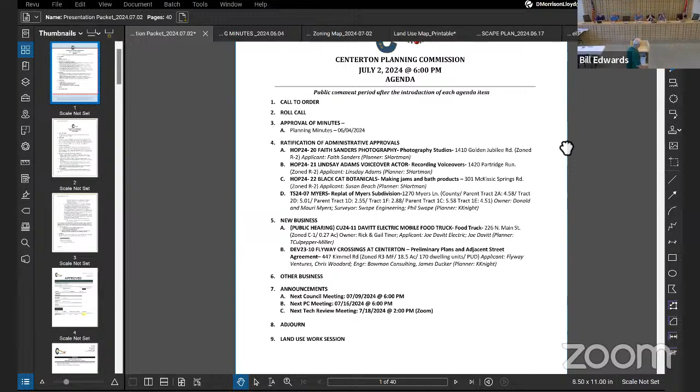Well, now we gotta wait on Rabal. All right, go ahead. Now we gotta wait on Rabal, going to Brian. Hey, you don't have to wait on him, go. I'll tell him you can start. Doc is paid, yeah, doctor's pay. Start the clock.

Doc is paid, pretty serious about getting the plat signed. I heard you got it. Kayla sent me an Instagram. Let me take your name. Kayla did? Yeah. You know what, she's not nice, I mean...

You sent me an Instagram about signing some plats. Oh no, I was, if it's urgent, not nasty, I'm sorry. All right, we're gonna get started before Joey gets in trouble.

Go ahead and call the City of Centerton Planning Commission meeting for July 2nd, 2024 to order with a roll call. Joey Ingle, here. Devin Murphy, here. Craig Langford, Jerry Harris, John Sessoms.

Here. Ben Lewis, Tony Davis, Brandon Swoboda, here. Jeff Seyfarth, I'm here. All right, first thing on the agenda this evening is the approval of the minutes from 6/4 of 2024.

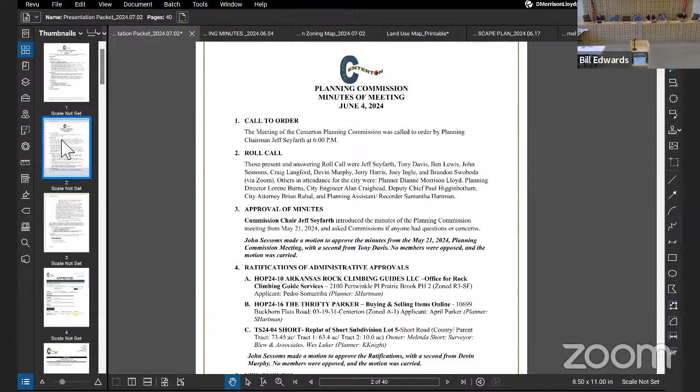I'll motion to approve the minutes from 6/4/24. Second. Motion is seconded. Is anyone opposed?

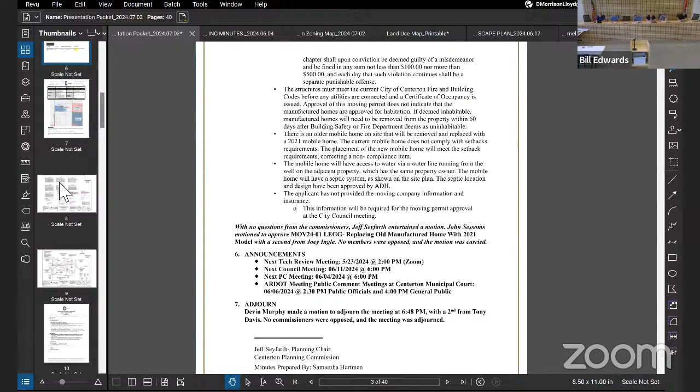All right, next on the agenda is the ratification of the admin approvals. Looks like we got a couple of home occupations, a photography business, voiceover.

Botanicals, making some products, and then we have a tract split. Any questions or comments from staff or any of the commissioners in regards to the admin approvals?

This is Joey, I'll make a motion to approve the administrative approvals. Second. Motion seconded, anyone opposed?

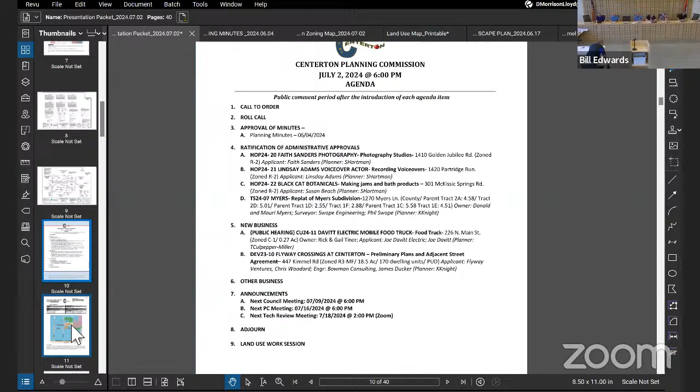All right, under new business this evening, we do have a public hearing. There's a conditional use 2411 for Davitt Electric mobile food truck.

That's at 226 North Main Street. It is on C1 and it looks like Rick and Gail Tiner are the owners and the applicant's Joe Davitt. Is the applicant here this evening? No. You want to just give us a little overview of what you guys are trying to do or what you want to do, if you.

As much as we'd like to be able to hear you back there, we can't, so just give us your name and what you guys are wanting to do for us real quick.

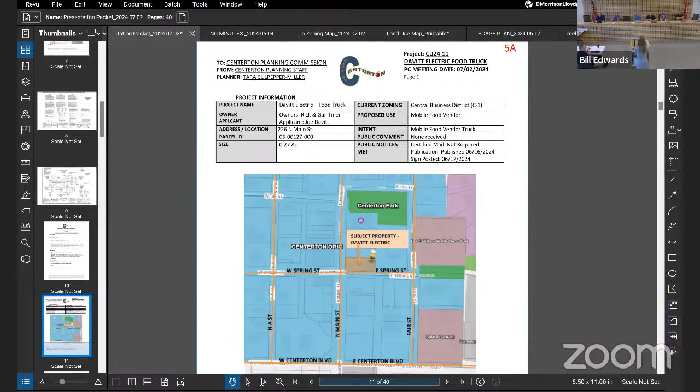Bethany Davitt, we are proposing to have a mobile food vendor, more than likely a trailer, a tow behind.

Did we do this years back with the ice? I let it lapse, and so we were trying to renew it, and so really we're just trying to reestablish it.

Are you gonna put it in the back? So you've had a food truck there before, right? Yes sir, in the back part of it. Is that where this one's going? Yes sir. Okay, all right, cool, thank you.

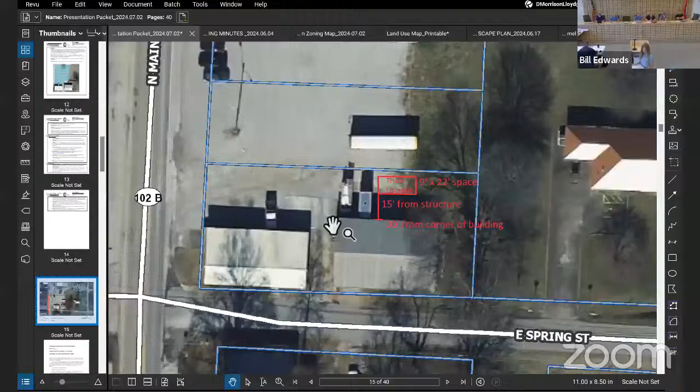Yes, I think a couple years ago this came over for, it was a parking and grease trap exposure that we looked at. So is this the renewal?

I think it's gonna end up being new, John. Okay, all right. Sarah, first time.

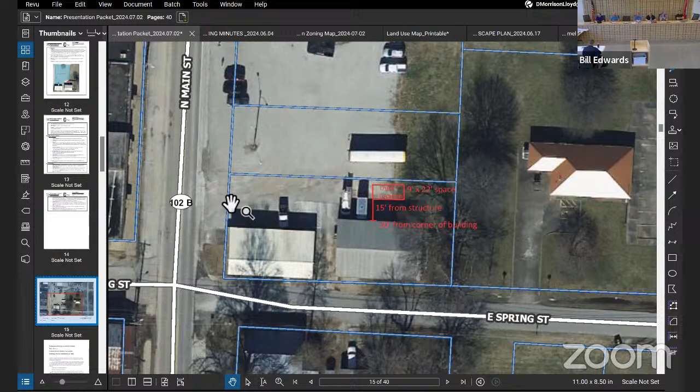It's Davitt Electric Food Truck, 226 North Main Street on 0.27 acres. It is a central business district and they met public notice requirements.

There is no food truck that's currently scheduled. The applicant's requesting conditional use for future use. This property previously had a conditional use in 2020 to allow for a mobile food vendor at this location that expired 7/21/2020.

The property is zoned Central Business District C1, which represents an area of intensive commercial use, including retail stores, banks, offices, and the like. It is the retail core of the city.

Due to the permanency of the existing structures and the nature of this district, structures may, subject to planning commission approval, be built to the front and in most cases side property lines.

The property is surrounded by Central Business District zoning. To the south of the property is a vacant building, and to the west of North Main Street is Bemco Inc. The old city hall is located north of the property.

The property can be accessed from North Main Street via an existing drive or parking lot attached to Davitt Electric. We received confirmation that customers of the food truck have permission to park in the Bemco gravel lot. Davitt has also noted that customers can park on their lot and use Bemco as overflow parking.

Public parking along Main Street is also available, that's in front of Old City Hall that customers can use as well. The proposed hours of operation are 8 AM to 8 PM Sunday to Saturday.

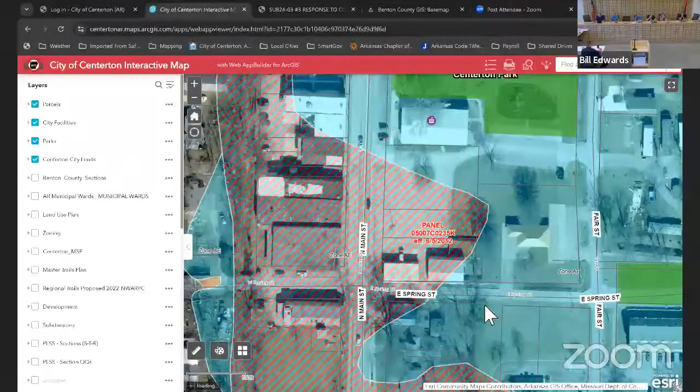Parking - they have permission to use the Bemco gravel lot for overflow. Our current off-street parking code and the mobile food vendor ordinance do not have specific requirements at this time, and any parking requirements would be at the Planning Commission's discretion for this additional use.

The hours of operation will be 8 AM to 8 PM Sunday through Saturday. However, days and hours of operation may vary from tenant to tenant, and operating hours are to be determined by the Planning Commission.

A fire inspection is required prior to receiving the business license and occupancy, and they'll have to go through Paul Higginbotham to schedule an inspection.

There will be 1 food truck in the designated location at a time, and no additional accessory structures are allowed, such as fencing, storage, decking, etc.

The food truck location is 15 feet from the structure and 30 feet from the corner of the structure.

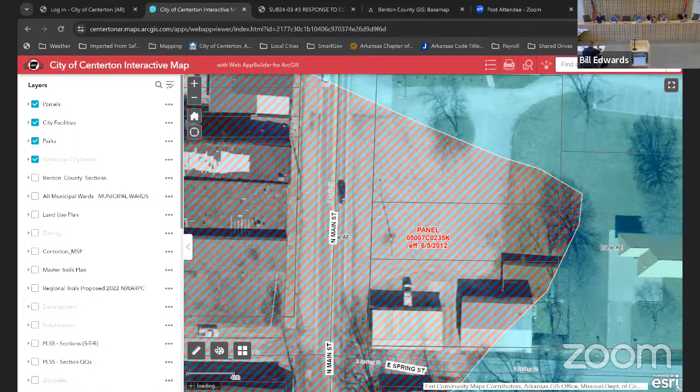The vendor or tenant shall be responsible for maintaining the premises in good, clean, and unhazardous condition. The applicant is encouraged to provide ADA accommodations, with owners to accept liability if non-ADA compliant.

The conditions of approval are shown in your packet.

Is anyone opposed to the 3-year request? No.

And then, is anyone opposed to taking the time restrictions off? That would be my recommendation, otherwise they're going to be back and forth between staff and us, and I just think there are other avenues in place if it becomes a nuisance that it could be controlled.

That's just my opinion, what do you guys think? I'm okay with that - if it becomes an issue... Yeah, I mean, it's a conditional use. All conditional uses can be brought back to us, right, if there is an issue.

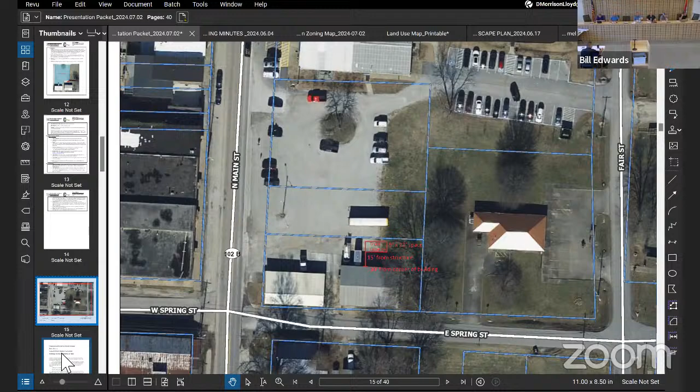Any additional questions or comments from any of the commissioners? So there was something here before? Yeah, there was actually a food truck in the back that was there previously. I don't remember the name of it, but it was really good. And up front, they had a snow cone truck at one point.

Were there any issues with parking, traffic, or waste disposal before? Not that I'm aware of. There were no issues with the one that was there previously. They were there every day too. It was right next to us, so it was very handy. We were like, oh, yum, food.

It was good. We've got two others operating right up the street. They don't have any services either. So I think it's a good spot down there with the downtown.

If there are no other questions or comments, I would entertain a motion for conditional use 2411, Davitt Electric Mobile Food Truck at 226 North Main Street, with a term of 3 years and no specified hours of operation. I'll motion to approve conditional use 2411, Davitt Electrical Mobile Food Truck, without any restrictions.

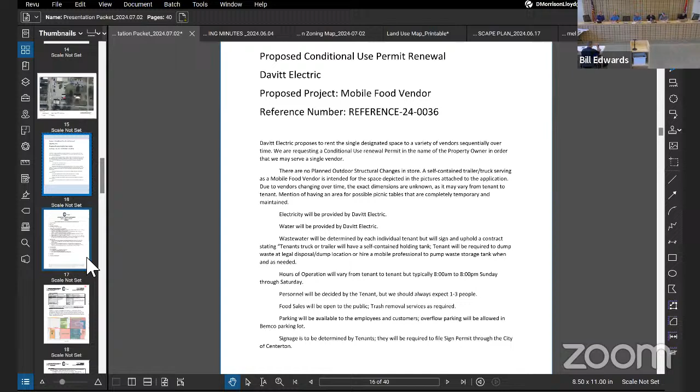Davis, yes. Brendan Swoboda, yes. Ed Lewis, yes. John Sessoms... he unmuted but it didn't come through. Sorry, yes, can you hear me? Devin Murphy, yes. Joey Engel, yes. Jeff Safar, yes. Thank you.

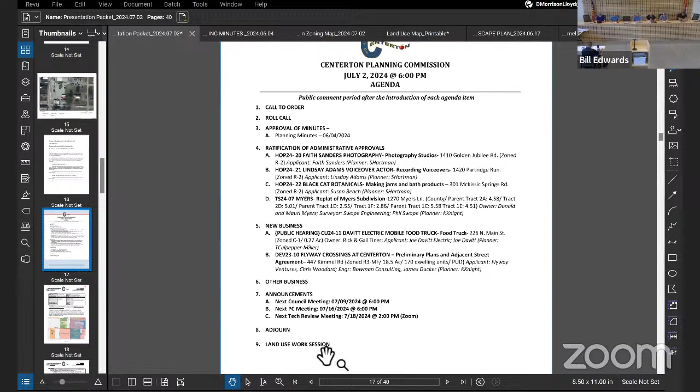All right, next on the agenda this evening is Development 2310, Flyway Crossings at Centerton, preliminary plans and adjacent street agreement. It is at 447 Kimmel Road, zoned R3 multifamily, 18.5 acres, 170 dwelling units, planned unit development. The applicant is Flyway Ventures. Is the applicant here to give us an overview?

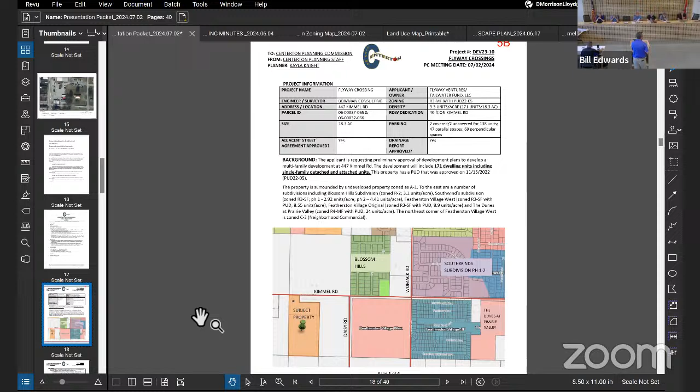Commissioners, thank you. My name is Chris Woodard, CEO of Flyway Ventures. We have a 171-unit built-for-rent concept that was approved from a rezoning perspective back in, I believe, November of '22, which is when we received the approval for that.

This is a mix of cottages, detached cottages that range from 1-bedroom duplexes, which you see in yellow, to 2-bedroom duplex, or excuse me, 2-bedroom detached and 3-bedroom detached dwellings. The 2-bed and 3-bed detached dwellings all have rear entry 2-car garages. The 1-bedroom duplexes have on-street parking, there on the south side of the property, the left side in yellow on the screen.

The purple and dark red are townhomes. Those are 2-bedroom and 3-bedroom townhomes. The lighter purple 3-building clusters are 2-bedroom townhomes. The dark red, I'll call those 4-unit clusters, are 2-bed in the middle and 3-bed on the end caps. Those are also rear loading access garages.

You'll also see, for the PUD requirements and our intention for the site, a lot of green space, pocket parks, as well as a clubhouse, pool, dog park, and walking trails—numerous amenities for the residents. This is intended to be a gated community as well, as you see on Kimmel Road on the right side of the screen, the north side of the property, which provides access to the leasing office there in white. That's also where the mail kiosk is for the residents.

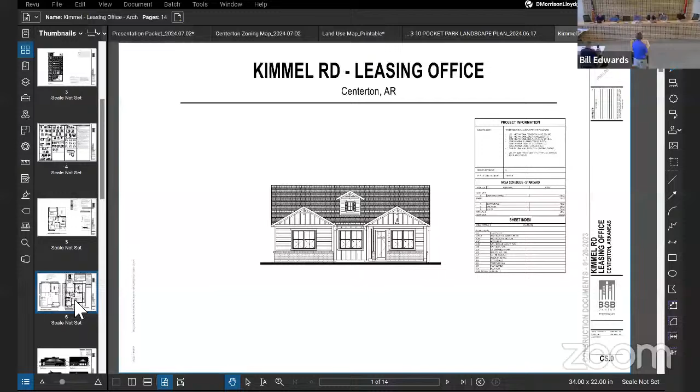To be honest, the leasing office interior is just a redesign of a unit that we're going to have on the site. The materials are a combination of Hardie fiber cement and brick skirting, more of a cottage feel for the detached units. The townhomes will be of similar style and nature, obviously 2 stories versus the 1 story cottages.

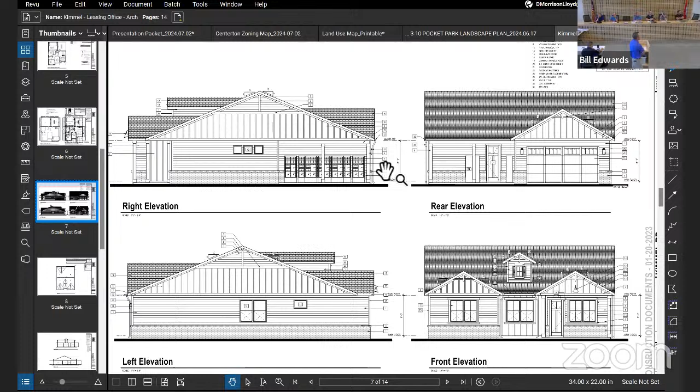So you said this is going to be a gated community? Yes, sir. So the roads are private? The roads are private.

You know, come back. Thank you.

Pamela? Yes, so the applicant is requesting preliminary approval of development plans to develop a multifamily development at 447 Kimmel Road. The development will include 171 dwelling units, including single-family detached and attached units.

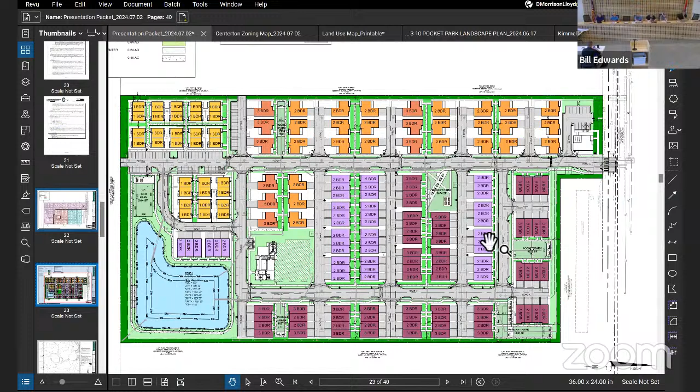The property does have a PUD that was approved November 15th of 2022. The property is surrounded by undeveloped property zoned A1. To the east there are a number of subdivisions including Blossom Hills, zoned R2, Southwind subdivision zoned R3 SF, Featherston Village West, zoned R3 SF with a PUD, Featherston Village Original, also R3 SF with a PUD, and the Dunes at Prairie Valley, which are apartments zoned R4 MF with a PUD. The northeast corner, Featherston Village West, has a small commercial area.

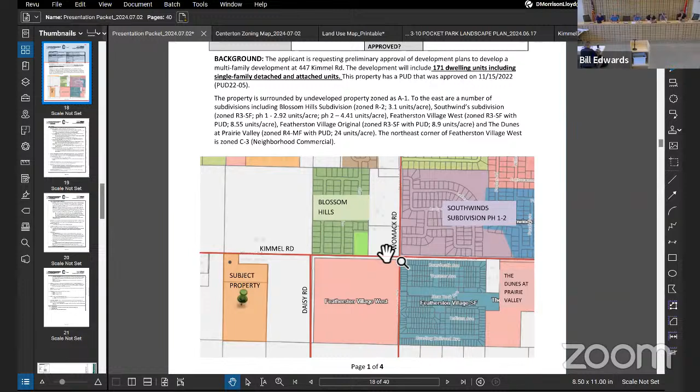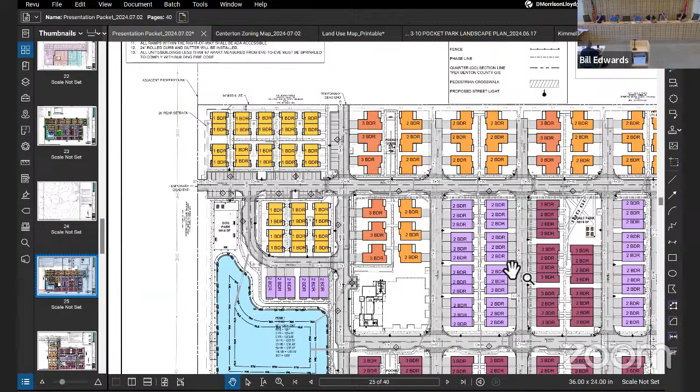With the PUD, there were some specific requirements they had to meet for ownership. The property has to be owned in a single corporate ownership at the time of filing. Right now it's owned by Flyaway Ventures, and there are no subdivisions in this development. They will have to complete a lot combination at the end of construction, combining the lots, dedicating right of way, and dedicating all easements instead of doing a plat now and a plat later.

For the density, they were limited to 179 residential units. They are proposing 171 with this development, so they meet that PUD requirement. That's 9.3 units per acre for those counting.

The architectural treatments, the PUD just required that it meets our code. Those were provided with the PUD. The facades facing the public right of way have articulations, and the material requirements were met. The only building actually viewable from the public right of way is the leasing office, and the front of the building faces Kimmel Road, so it has the articulations it needs.

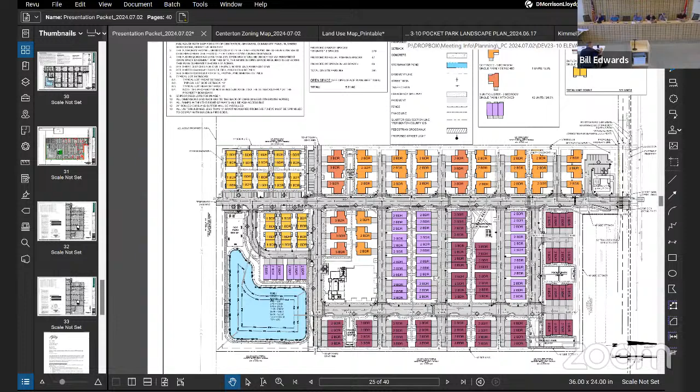For open space, they had to dedicate at least 25% open space. Per their current plan, they're dedicating 5.33 acres, which is 29% open space. For amenities, they had to include a clubhouse facility, pool area, dog park, and pocket parks, and all of those things are included. There's also a walking trail around the pond, and sidewalks throughout the development for circulation.

For the zoning, it's R3 MF, medium high density multifamily. The setbacks were not reduced with the PUD. The PUD basically just allowed them to have all of those units on one lot instead of each being on their own lot.

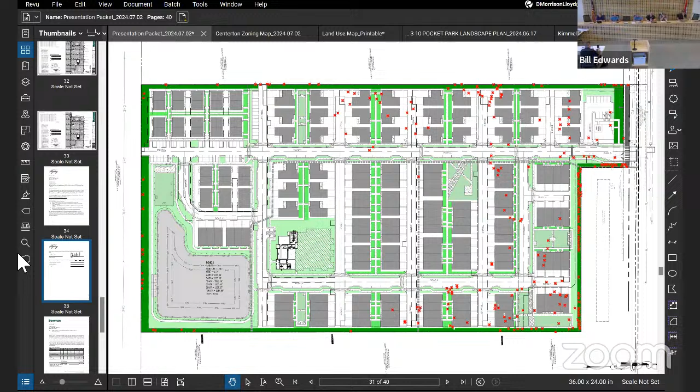There are some existing structures on site, including 2 buildings and a shed. In addition, there is a well on site. All of that is to be removed with this development, and they'll have to provide the abatement documents for the well.

For the utilities, there's water and sewer available along Kimmel Road. The note in my report says that Centerton Utilities is still doing their review. They finished it at 3pm today and had no comments, so you guys could ignore that note.

For the wetlands and floodplain, there is an existing body of water on the site. For the wetland study, the wetlands are not jurisdictional.

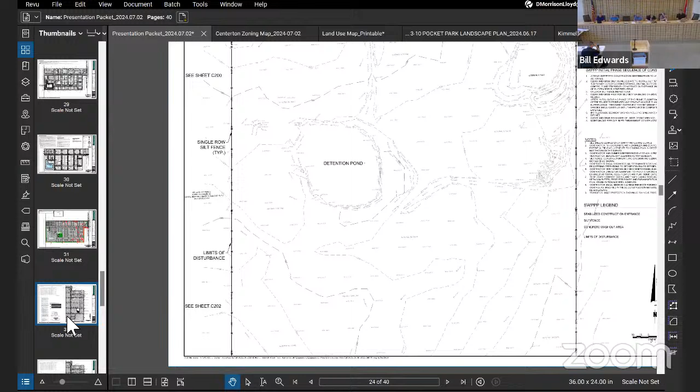For their access and adjacent street agreement, the internal roads, this is a proposed gated community, so all internal streets are private, with a minimum width of 24 feet including curb and gutter. Where parallel parking is proposed, that matches our 30 foot back of curb local road section. There are 5 foot sidewalks provided throughout the development for pedestrian circulation.

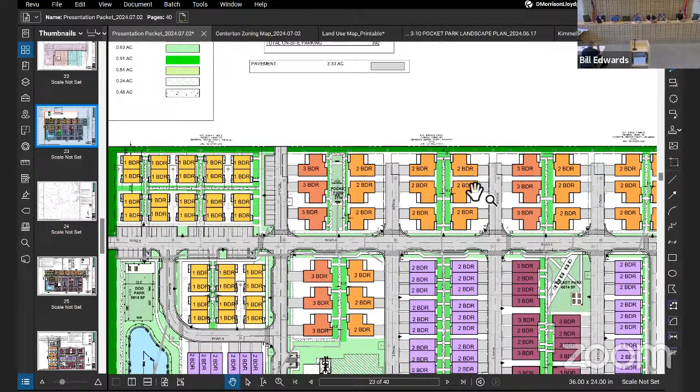Going back to the site plan, there are a few alleys instead of full road sections. Those are 24 feet wide to allow for 2-way traffic, and that's road D, E, and F. It ended up being a road because of fire access requirements, and those middle clusters don't have a full road, just the alleys, which is why those alleys are so wide.

So it was to allow 2-way traffic and to meet fire code so that we didn't end up with parking conflicts and then have a fire truck that can't get through there.

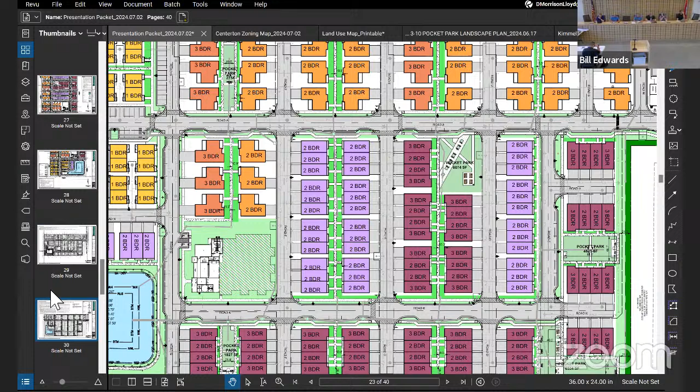Kimmel Road is designated as a major collector with a planned right-of-way of 80 feet. This development will dedicate 40 feet of right-of-way from the section line, which is also the property line, to meet the master street plan requirements.

McKissick Springs Loop, which is a 12-foot trail, is planned along Kimmel Road. This development will build the 12-foot trail along their property frontage. A street light will be provided at the entrance.

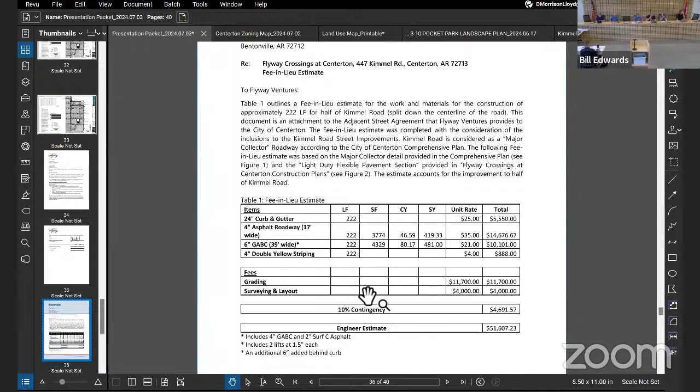The developer has requested a fee in lieu of all their road improvements, including the road widening, curb and gutter, and striping. That fee in lieu is in your packet and it comes out to $51,607.23. Due to the length of the frontage of this development, which is only 222 feet, the Public Works Director and City Engineer recommended that the developer propose a fee in lieu. The estimate provided has been approved by both the City Engineer and Public Works Director, and is recommended for approval by the Planning Commission.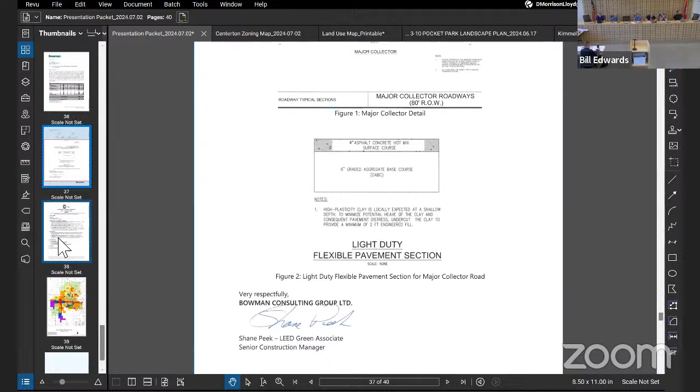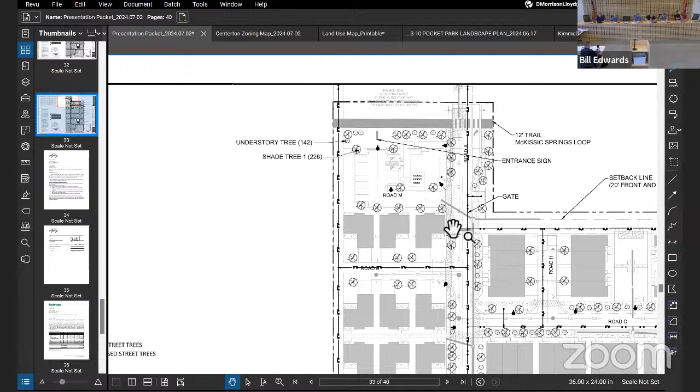There are street trees proposed along Kimmel Road outside of the right-of-way. However, the Public Works Director stated that because cars will have to stop further back at the entrance to avoid stopping on top of that 12-foot trail, the sight triangle requirements prohibit street trees from being planted along Kimmel Road at this time. They've stated that when Kimmel Road is improved in that area, the Public Works Department will plant trees along the road. So staff has approved the adjacent street agreement and recommends it for approval by the Planning Commission, contingent on that one minor comment being noted in the agreement - that there won't be trees planted now, but the Public Works Department will plant them later.

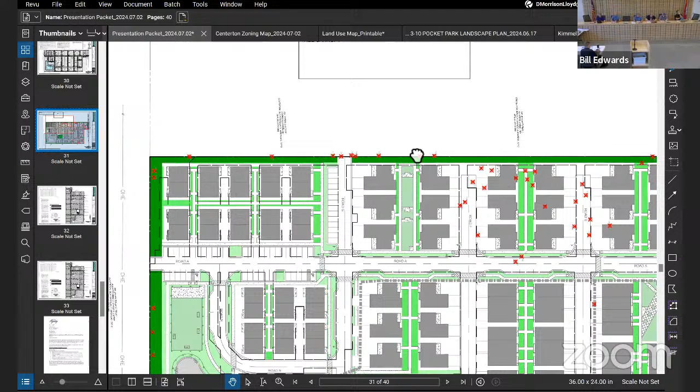For drainage, there is one retention pond proposed in this development. The bottom elevation is 1,247 feet with a normal water surface elevation of 1,251 feet, resulting in a water depth of 4 feet. The top of the pond is 1,258 feet, resulting in a total depth of 11 feet. There is a 4-foot black vinyl chain link fence around the pond as approved during the PUD. The City Engineer has approved the drainage as proposed.

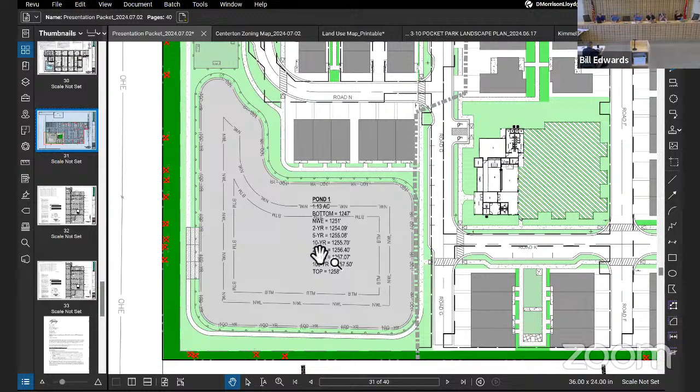For the lighting, there are street lights proposed throughout the development to light the streets, and there is decorative lighting along the walking paths and within the pocket parks. The photometric plan has been approved by staff.

For the landscaping, they did provide a tree preservation plan. However, no trees will be kept with the development. Per the applicant, based on the geotechnical report, the existing soils on site are poor quality, and at least 2 feet of the site will have to be removed. The elevation difference between existing and proposed grades varies around the site, meaning saving trees would create the potential to impair both site drainage and tree condition. So they will not be keeping any trees on site, but they'll be planting quite a few.

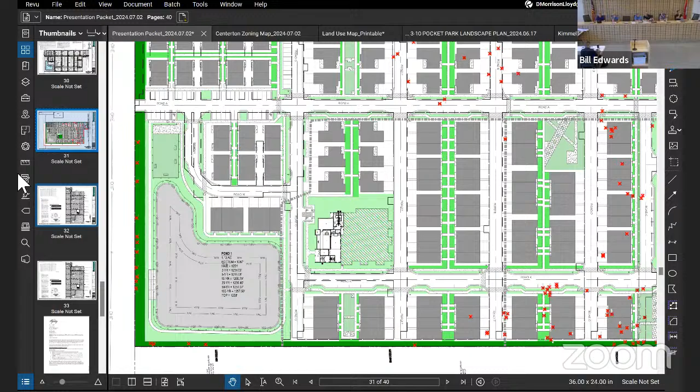If you look at the landscaping plan, per the PUD agreement there had to be trees within the pocket parks. So there's an exhibit that Diane Scott pulled up in Dropbox, but not in your packet, that shows those trees within the pocket parks.

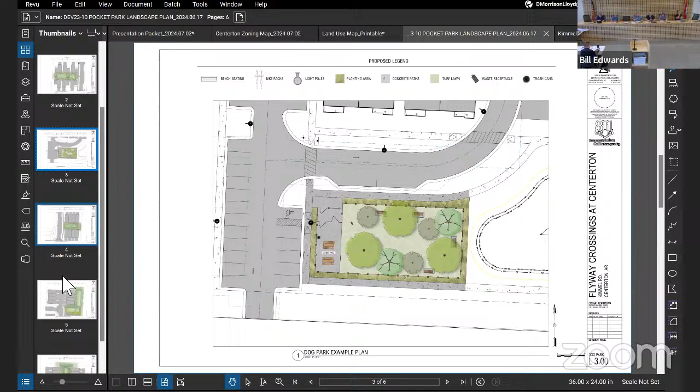As I already stated, there were street trees proposed along Kimmel Road, but due to the conflict with sight triangles, they won't be able to be planted at this time. There are lots of interior trees proposed throughout the development along the roadways as required by the PUD.

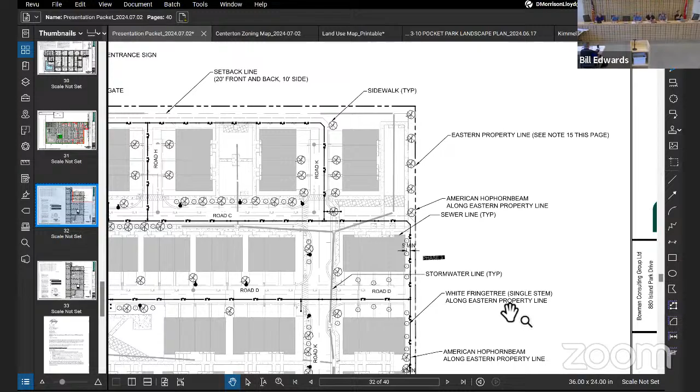For the landscape screening, you required that there be trees along the east and south property lines, where the multifamily housing is. So they do have those trees shown on site. They are pretty close to a water line, so the Centerton Utilities Director had to approve the species and how far away it was from the water line, and they have approved that.

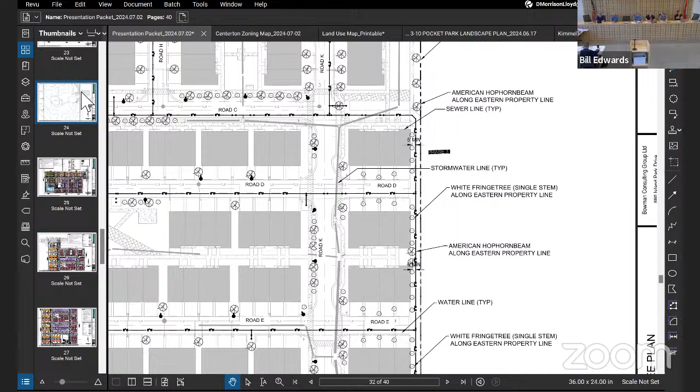For parking, 138 of the units have 2 covered and 2 uncovered parking spaces. 47 parallel parking spaces are provided along the street for the clubhouse and additional visitor parking. And then there's 69 perpendicular parking spaces for the 1-bedroom cottages on the south side of the development and for the dog park.

The proposed parking meets the PUD requirement. Due to the number of units proposed and this development only having one access, this development will be sprinkled. This development is proposed to have 3 phases, with phase 1 being 65 units, phase 2 being 46 units, and phase 3 being 60 units.

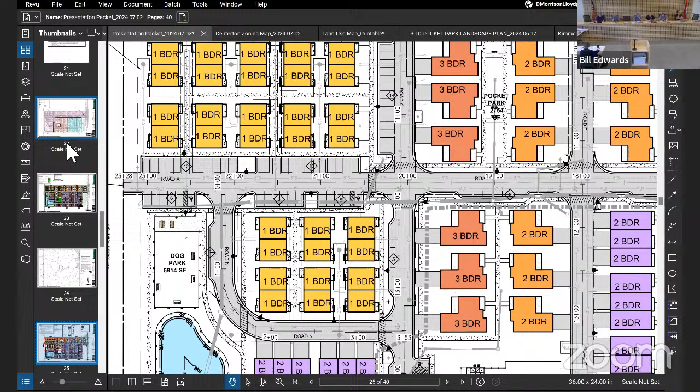There is a sign proposed along Kimmel Road that will have to be permitted by Public Works. There are very minor comments remaining on the plans, so we recommend that approval be made contingent on addressing the remainder of staff comments, mostly labeling and clarifying a few areas.

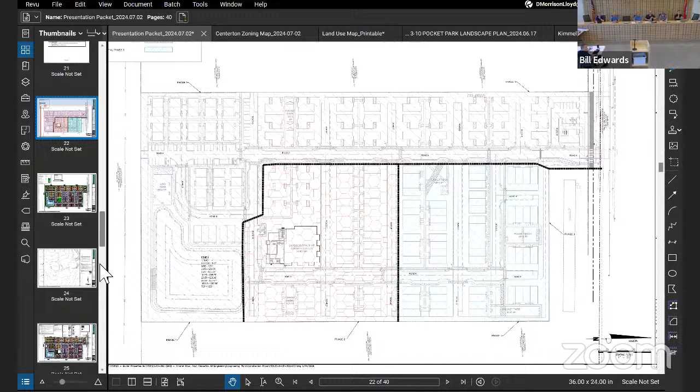Since you guys aren't planting the street trees, can we move that as a line item expense for later, since they were already going to do them? That was a comment we got, I believe yesterday or today, and we haven't had a chance to discuss it, but we're happy to update the fee in lieu to calculate the price for the trees and resubmit it to include that.

I got a couple more for you, sir. Being a private kind of development and being gated, I don't see any mention of a fence. I assume you're going to perimeter the entire site. Yes, there is fencing on the perimeter.

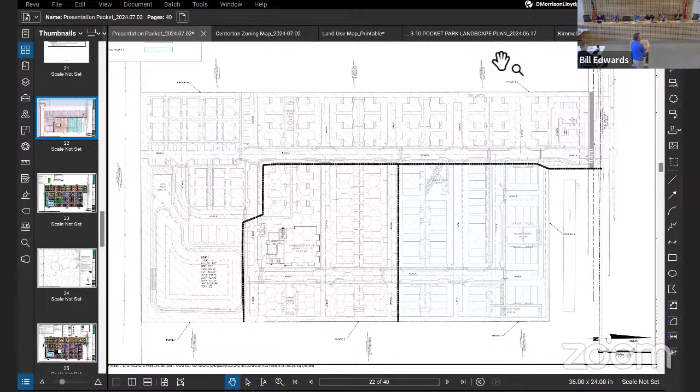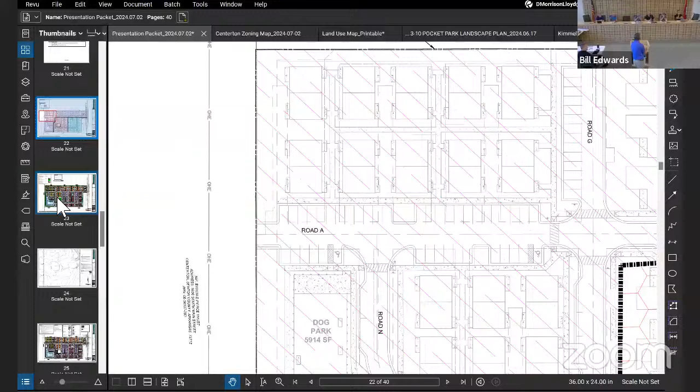There will be gates. I believe it was the request of the city to have an access point on the south side that is gated, and that will obviously be on Kimmel, will be a motorized gate. The gates on the south side and any other access point, or stub out, will just be permanent gating.

To give you some idea of how the units face each other, it was intentional that all the units are rear loading. So when you see units with green space, the pocket parks or the mews, those are the fronts, the front porches. You walk out onto a green space from the front of your house instead of walking out to your garage. That was intentional, to provide connectivity through the neighborhood.

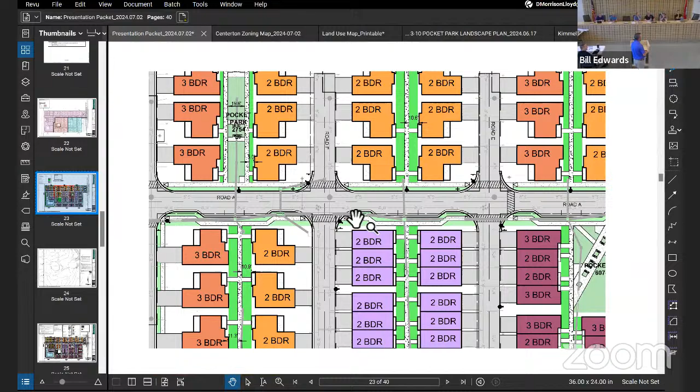Do you know the fencing material for the perimeter? We don't yet, happy to discuss what that will be. I think there's probably a landscaping requirement on the east side, so that would be the landscape buffer there. I anticipate it would probably be 6 foot wide, 6 foot privacy fencing, wood privacy, and then on the southern stub, we're stubbing it to the property line.

It's a private road. Is that for future connection? That's what it was intended for, and also fire access. At some point, when this area builds out eventually, that'll be one of the things. We're obviously sprinkling the entire site because we have one ingress/egress, but we were willing to provide additional access points to help assist down the road when the area around us develops, providing more emergency access even though we are sprinkling.

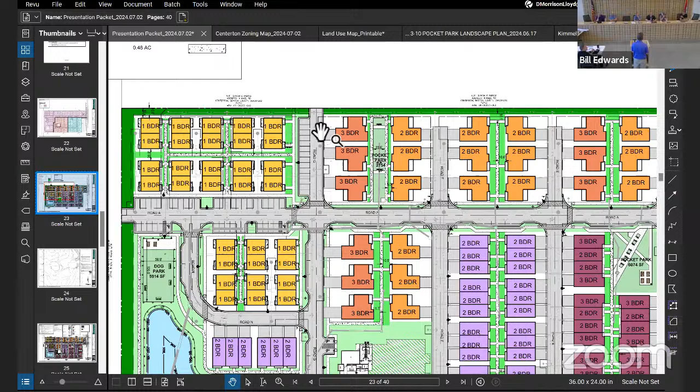Not necessarily a public street connection? No, but the streets are in essence private, though I think we meet all the public specs from a design standard. So if there was a time when the city or ownership approached us to take over the streets as public, I think that is an option down the road. So we did provide that connectivity as well.

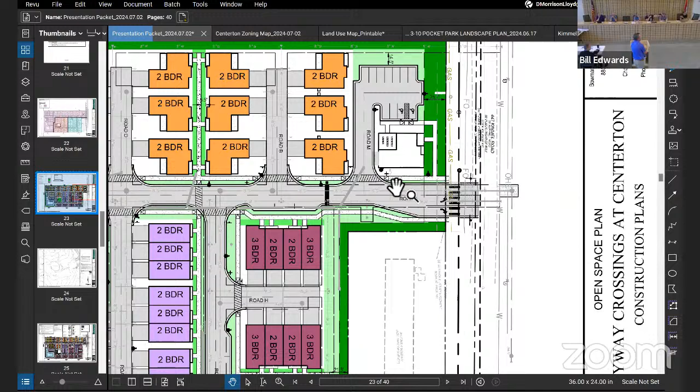That building there, I had to read the plans to figure out what that is. The white building? That is the leasing office. No wait, I'm sorry, to the page, that's the chicken houses along Kimmel Road. Our property line doesn't include that, it has a boot at the top, and the chicken houses, if you're driving along Kimmel Road to the east of our entrance, that's what that is. That's not our property. I'm just throwing this out as a discussion point, but I assume that probably won't last too long, the chicken house.

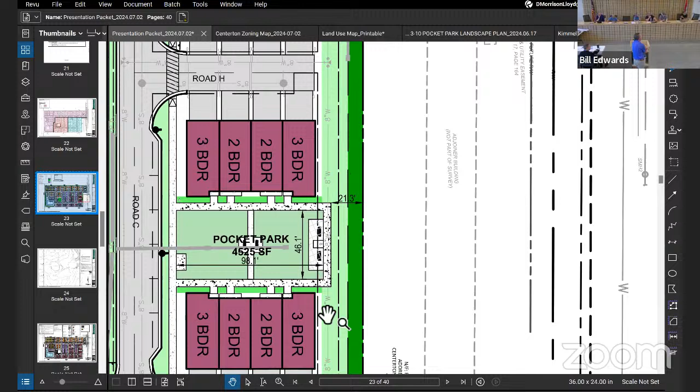I was just thinking about landscaping along that northern property line. Seems to be accessible, I think there's a water line in there, but I'm throwing that out there because eventually I think it will be visible from the right of way, and who knows what's going to go in there, but I don't know what y'all think about that. I think we had one on that northeast corner, there's one tree there.

I think you meet all the requirements, but you might think about that for those residents. Sure, and we're not opposed to adding that down the road, right now.

Obviously, there's several trees that I think we have to cut down to get to the density that we're at now. You got a lot of site prep to make this happen.

This is a year and a half, year plus process of working with the city, and graciously working with the city. They're probably sick of me coming to their office to have meetings, but I hope it comes through that there was a lot of collaboration that went into this. It's a really good, clean set of plans, and I appreciate all the time and effort y'all put into that to present.

So I have to thank too, we have our team, Bowman, the engineering team, and then Anthony Varsity from BSB, the architects, are also on Zoom right now. So if you do have any specific questions, I know they're happy to answer them, but they deserve a lot of credit as well. Looks great.

That's all I had. Question I have is, I'm not seeing the dumpster pad for like a clubhouse. Are you gonna? I think we are planning on using just rollaway trash cans for all sites for the clubhouse as well as the units.

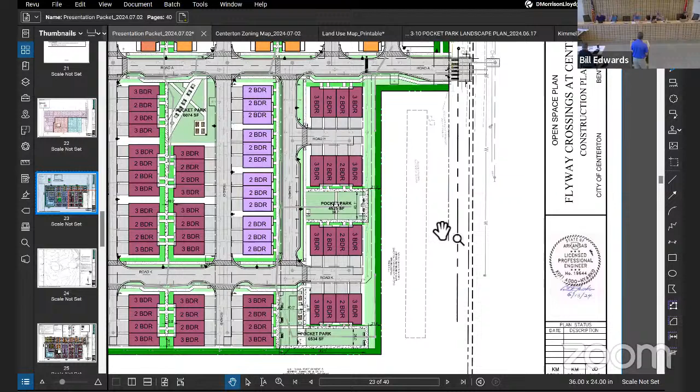Back to Joey's point, I understand that's just gonna be a wood fence. Correct. Okay, let's make sure I understand. So it's gonna be- yeah, we don't mind to do either, if we can agree to do either landscape buffering or fencing, we're fine with either. If we can work that, make sure the species works for the water line and all that, we can work through that. It stood out to me on the planting plan because it was kind of just a bare spot and I was just bringing it up. Sure, no problem.

Have you thought through the whole trash thing now that you mention it? We have, yes, we debated that. I mean, 340 trash cans. You got regular and you got recycling. Oh, okay, yes. Got 170 units. Sure, no, that makes sense.

We will have a property management team, obviously, where it's a single owned site. It will be critical that trash cans are pulled in within 24 hours. The site obviously has an on-site leasing office, so the management team will be on site to make sure that is taken care of, and the site continues to look clean.

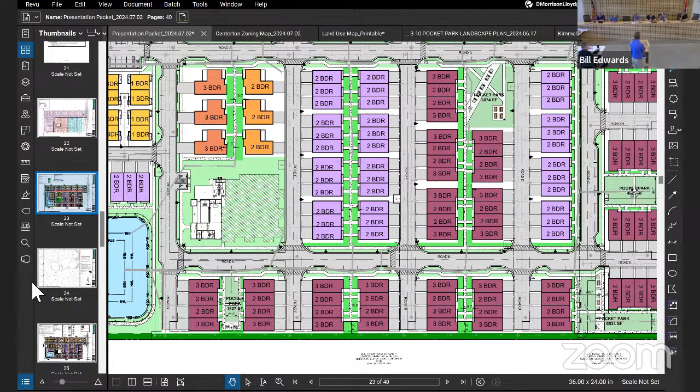Well done on everything. Along Kimmel Road, there's a lot of information here. What is gonna happen to their section of Kimmel Road? So with what's going on currently, the road is right where it has that meandering line where it gets real wide out. If we widen it there now, it's not gonna function, it's probably gonna be torn apart. So when the property near him, if the property to the east of him develops, we should take it all the way to Daisy. We can get that full side widened the way it needs to be.

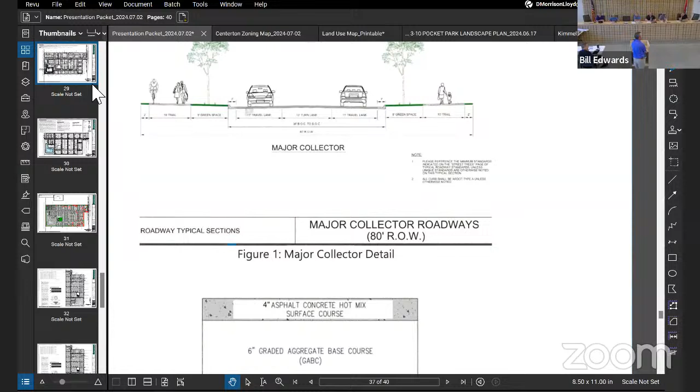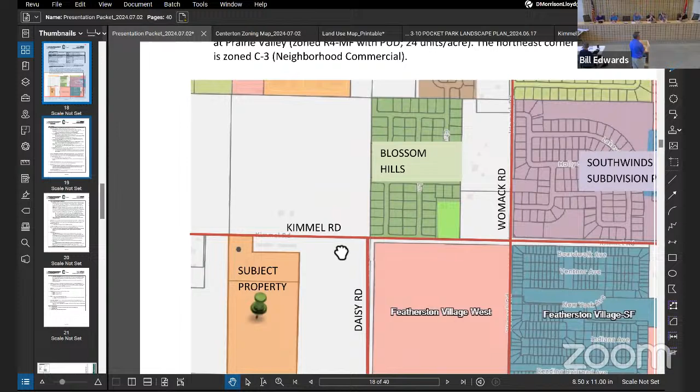It'd be the same thing that we're doing with Featherston on the other side, where we will attribute this fee in lieu to that contractor to do the additional work to extend it the extra - what is it, 250 feet? If you look at this map, the whole east side has been developed, but he's in a little pocket where nothing's developed around him yet. So it doesn't make sense to only improve 200 feet of road. So we'll just get a fee in lieu, and then when that widens, that money will be applied to it.

But he is gonna do the sidewalk. Yes, we are getting the trail, it's in the right spot, we are doing the trail. Okay, that's good, because Ben would ask for that if you didn't do it. We're happy to do that. You're good with all that?

Yeah, I mean, if we widen it now, it's not gonna stand up, and it's gonna actually cause more issues, 'cause people are gonna be like, why is this wider? As much as I like to get road improvements when they should happen, I don't think this one makes sense. We rarely want to take the fee in lieu, but here it actually makes more sense than anything else. And I love the private gate and everything you're doing there. Traffic, when you get a private gate, gates gotta open, gates gotta close, people gotta wait. It's a high traffic road.

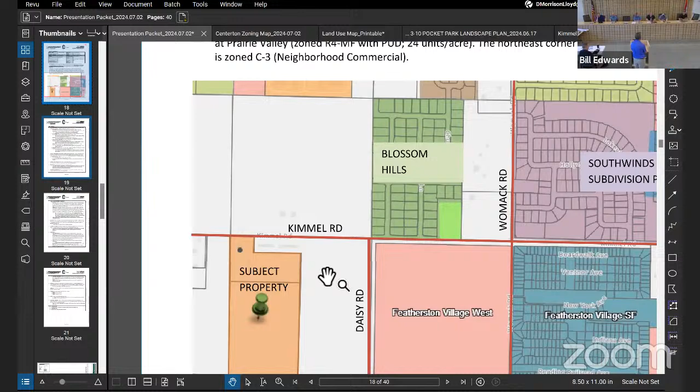Sure. Is there, how did y'all think through that, or did you think through that? We did. We were quizzed pretty hard when we were looking at this with the PUD and the rezoning at the time, and the traffic flow as it sits.

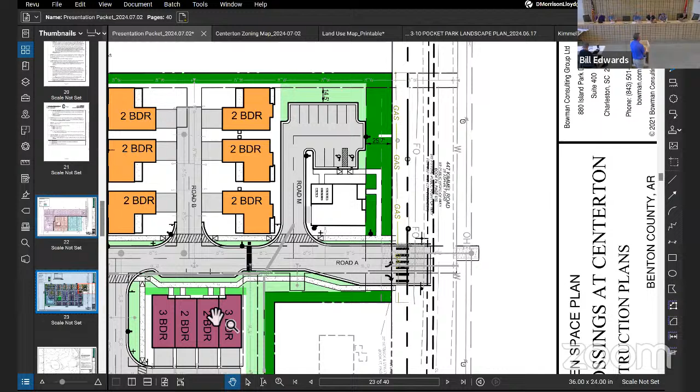As you can see, we do have a left turn and a right turn lane there for exiting, but coming in, we think that flow of traffic, 171 units, we did a study on how many people work from home, kind of the staggering of how people leave in and out of a community. We feel like it's adequate.

It looks like you have about 175 feet of stacking to get to that gate from the road. Oh, you see that? Yeah. Okay, I thought the same thing at first, but they set it well back into the site. Okay, great, thank you.

The intention of the gate is to stop access before we call it kind of the public point, which is the leasing office itself. So people will be able to come into the leasing office without having to go into the gate. That should hopefully provide ample room for traffic to flow there before they get to the gate. The gate's not actually right on Kimmel, as far as that goes.

So with it being sprinklered, what responsibility is there for you? The sprinkler system that they're putting in is an integrated inline, residential only. So if they have a sprinkler head go off, we will never know until somebody calls us. It's not like here, as soon as water starts flowing, we get dispatched. This is a totally different system, a lot smaller, a lot cheaper, and there is a cost to it, but it was the best option we had. Okay, cool.

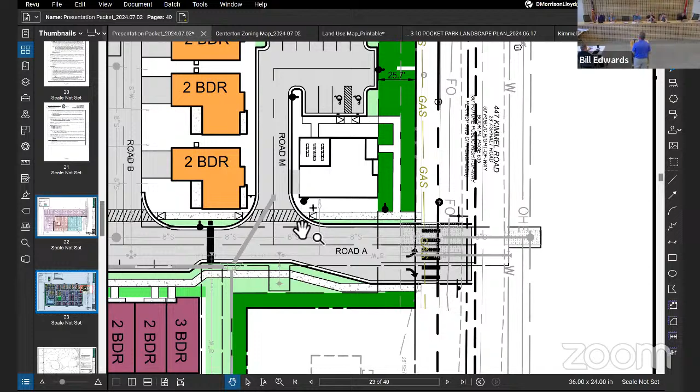Is that basically required because there's just one entrance? Well, all townhomes have to have sprinkler systems in our city. Over half our site was going to have to be sprinklered anyways, so with the ingress egress it was kind of a moot point, but we thought with fire safety, there will likely be families here, so why not go ahead and sprinkle the additional 60 units.

The exterior of all of it, whether it's detached or attached, is similar. Very, very similar, yes, absolutely. We'll make sure you get a copy once they've been submitted, the architectural plans, but it's a mixture of masonry, brick, and fiber cement or Hardie board. So those are the materials being used on the exteriors. Oh, that's the 13R, 13D circuit.

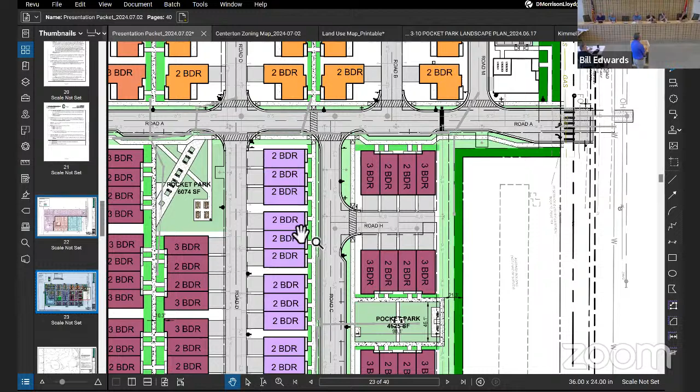Any other questions or comments from any of the commissioners? Thank you. So this isn't so much a— we just need— microphone, please, we just need to know your name and address for the record.

I'm Cindy Berry. I live at 981 Osage View Drive, just over by the concrete factory subdivision there, off of Horse Pond Road in Kimmel, okay.

My question is, I have one of the larger houses around here—not huge by any means, because most of the houses around here are very small, or on the smaller side. I know this has already been zoned, this is already in the works, right? I do wonder whether it's leased or purchase. That's a question for you. It's lease only. It's a single plat, a rental subdivision, so it's just a single plat that we have an agreement we can't subdivide again.

Thank you. So there's a lot of transitional housing in the area around Kimmel Road, up and down Kimmel Road. I do worry about property values. I don't understand why there's been so many multifamily and really, really small homes built in the area. Maybe you can't get the developers in, but Kimmel Road is a mess. The traffic there is awful. And you start adding 170 more units and 2 or 3 people per these homes, maybe more, it's a real mess. There's not enough grocery stores around here to support the people around here. There's a lot of things that haven't happened that really need to happen to support this mass growth of smaller homes, smaller lots, multifamily homes, that just hasn't been here. That part is very disturbing to me, as a homeowner.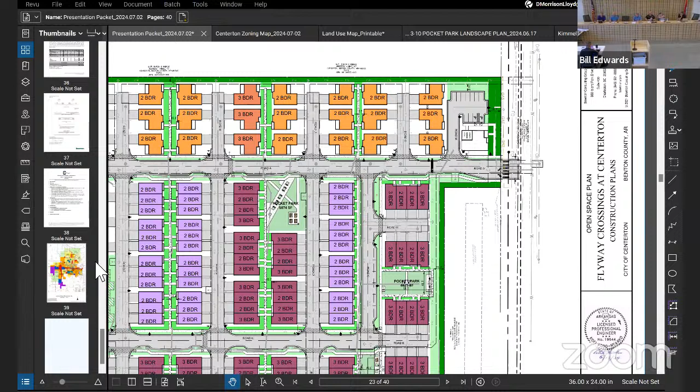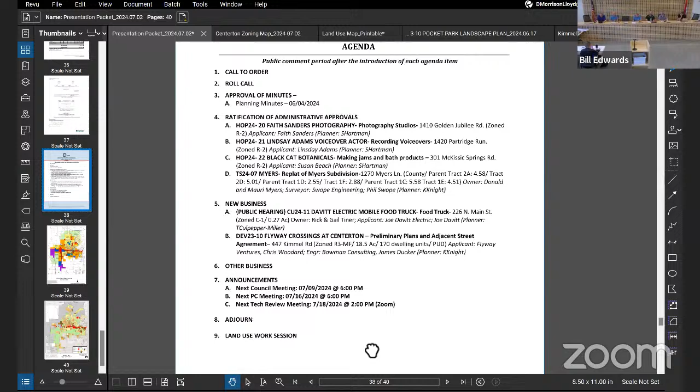Under announcements, there is a council meeting on 7/9. The next planning commission meeting is 7/16. If you can't make it, let us know. And there's a land use work session on the 10th to discuss that.

After we adjourn this meeting, I will give you an update on Title 15. Late this afternoon we received a clean draft. I'd like to send it to everyone to look at. I know Joey just got his fingers on that, so I'll send it out to the commission so you all can start looking at it.

There were a couple of things that they are still looking at that haven't been addressed. We'll get that to you so you know those outstanding items.

One thing I'd like to request for additional information is, for industrial and commercial areas, how much acreage do we have? Like the industrial area, I think it's in there. I remember we had the one lot split where they brought up hard facts on the amount of acreage that was proposed. I don't know if they measured that, but I thought it was in there. I just want to make sure we have that information.

He's talking about it looks like the industrial park on this map. About Title 15? No, he's talking about land use. Sorry, he moved on. Yeah, I'm sorry. Hold on, stand by, Tony.

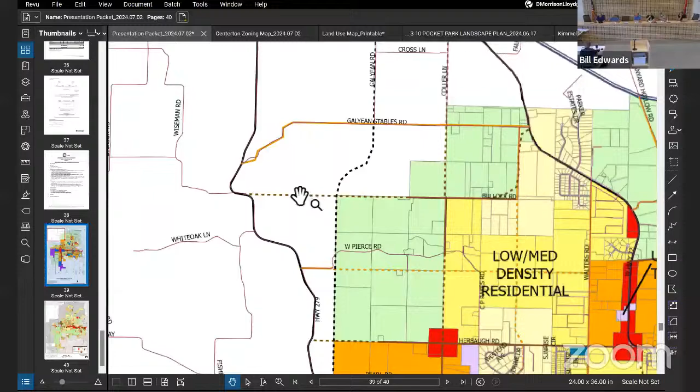For example, Seba Road is designated as an arterial, where we've talked about reducing it, putting it back to a collector, a major collector or something. We do have the master street plan shown on the drawings so you can see that.

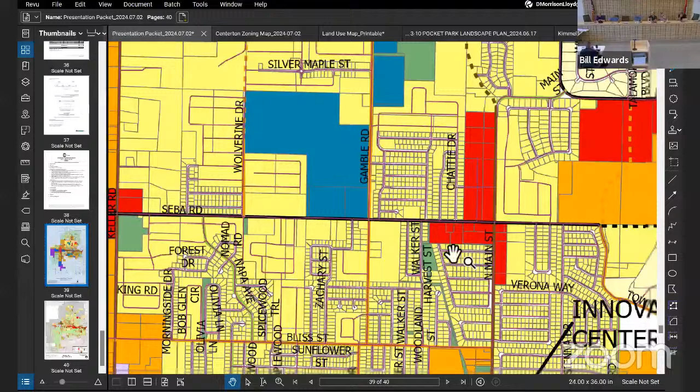Do we have any info on CIP plans or anything? No, we do not have a CIP plan. So you want to do that afterwards? So planning commission wise, we're good.